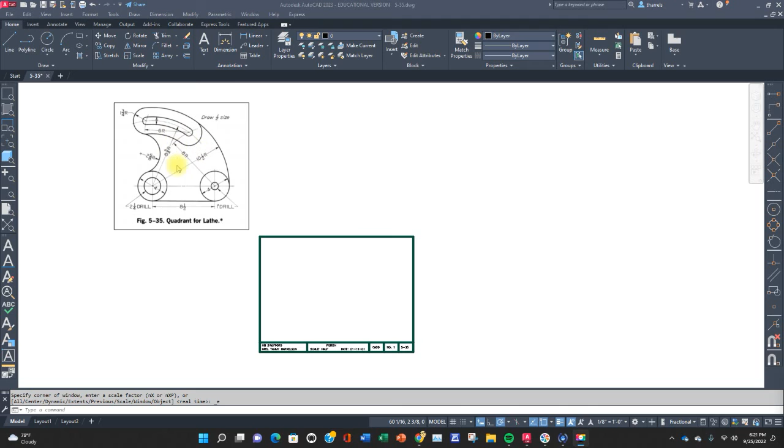I'm going to show you how to get started with 5-35. This is a half scale drawing, but we don't want to do any more work than we have to. We're not going to take every measurement and divide it by half. That's way too much work. We're going to draw it full size.

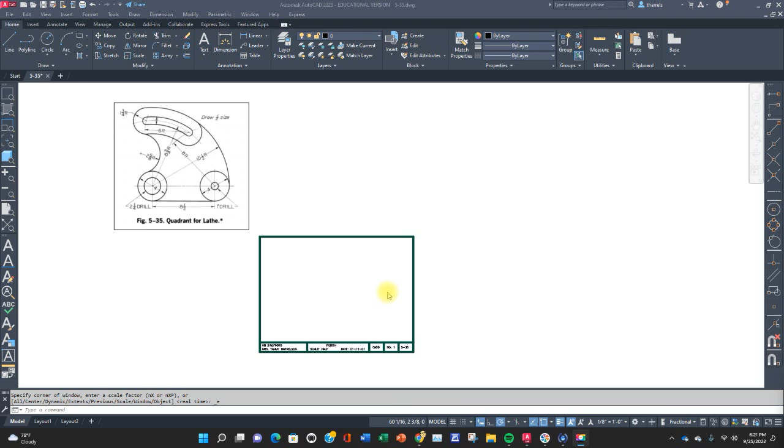The easiest way to draw it full size is to start out with our title block double the size, because this part is obviously too big to go into the title block and we're going to have to scale it down by half. So let's go ahead and double the size of our title block. So then when we scale everything down by half, the title block will be the original size.

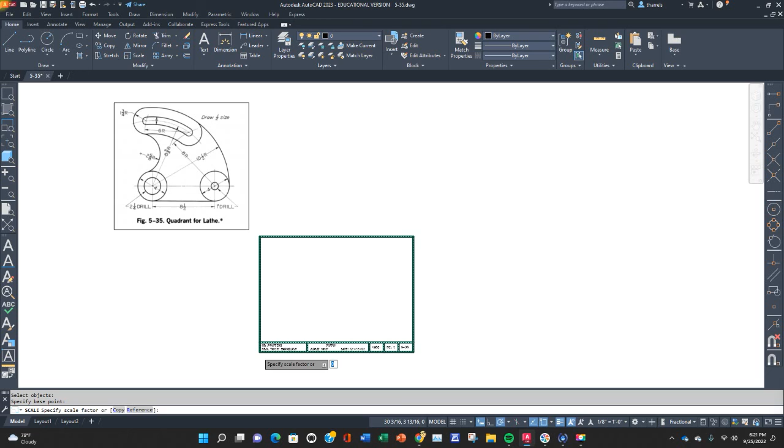So we're going to go to scale. You're going to select the entire title block. Right mouse click because you don't want to select anything else. Pick a base point. It really doesn't matter your base point, but I'm just going to pick the lower corner. I need to double its size, so the scale factor is going to be 2. So now I have doubled the size of my title block.

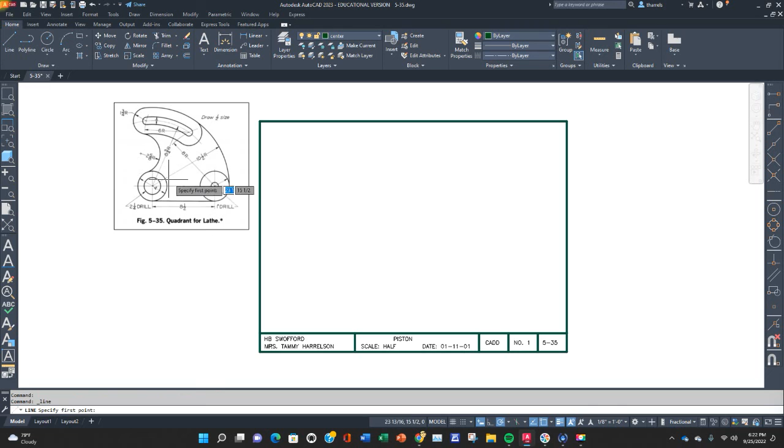So to get 5-35 to fit in the title block and put it in the right place, let's look at what we've got going on. So we're going to go to our center layer and let's use our midpoint and midpoint like we normally do. Let me double check my object snaps. Oh, see, my midpoint was not on, so always check it if it's not working right. So let's go to midpoint. So it tells me that 8.5 is in between those two center points.

So let's take half of 8.5, which is 4 1/4, and we're going to offset that on both sides. So now there's 8.5 inches in between those two center lines. I don't need that anymore. So this center line and this center line is that center line and that center line.

So now let's get the bottom of our part. So the total height, the highest point is going to be this 10.5 radius plus the radius of this 4-inch diameter circle. So the radius of a 4-inch circle is 2. So 10.5 plus 2 is 12.5. Divided by 2 is 6 1/4. So let's offset 6 1/4 down.

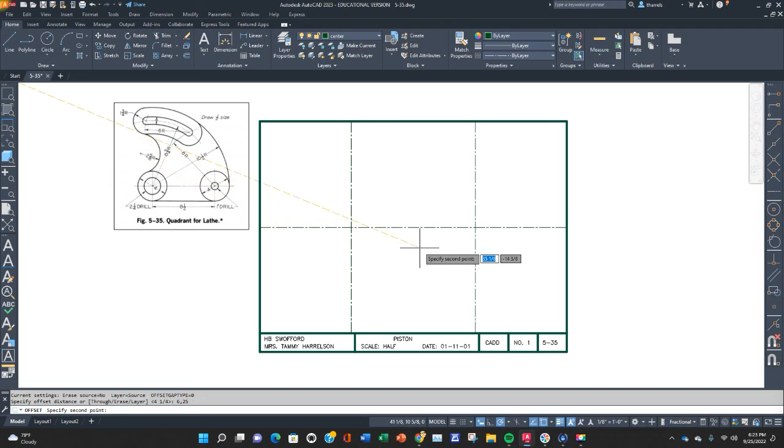I don't need that line anymore. This line is now the bottom of the part. So to get to this center line, the radius of that 4-inch circle, I'm going to offset up 2. That becomes an object line because that's the bottom of the part.

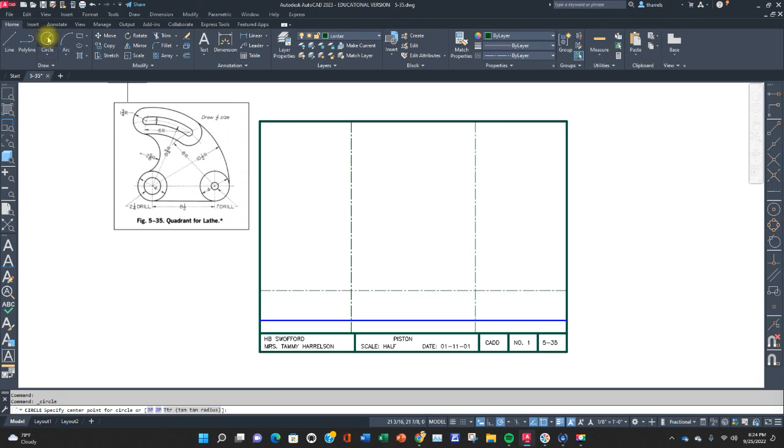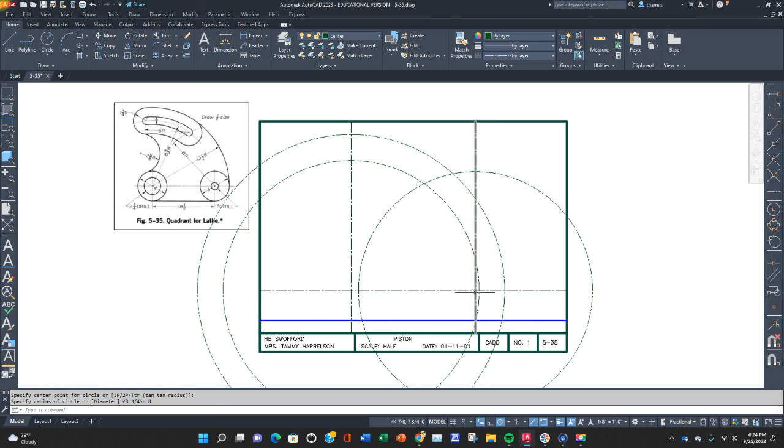And now, as I've told you in the explanation video, this is all circles. Circles everywhere. So if you start out at your center point and put in this 10.5, and then from there, if you build onto it, if you put in your 8 3/4, from this center point, you've got your 8. See, everything's building onto these center points. So if you just follow your dimensions, you can start building the part and trimming everything that you don't need. So once you create this part, you've trimmed everything out.

In order to turn it in, you're going to go to scale again. You're going to highlight the entire thing, right mouse click, pick a base point, and your scale factor is going to be half because it's a half size drawing. So when you hit enter, you'll half everything down and it'll be ready to turn in.